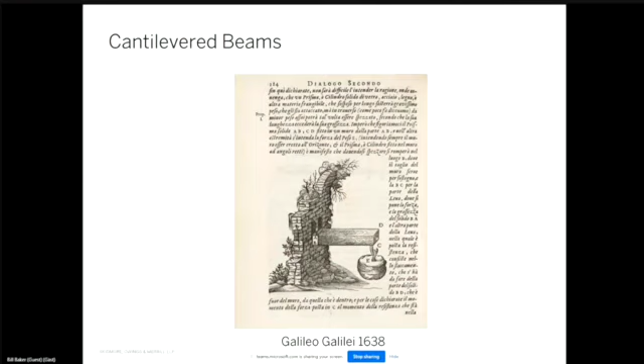The study of cantilever structures goes way back, to Galileo, perhaps the first modern structural theorist, who in his dialogues of 1638 speculated about the engineering mechanics of a cantilever. I can't say he got it completely right, but he got the conversation started.

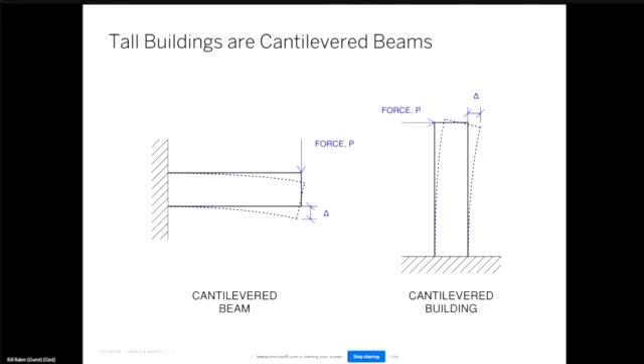While he was dealing with the cantilever coming out of a wall, a tall building is merely a cantilever out of the ground. In many ways it's a conceptually simple problem, because the load only has one load path, which is downward. Through understanding it as a beam, one can come up with very clear ideas.

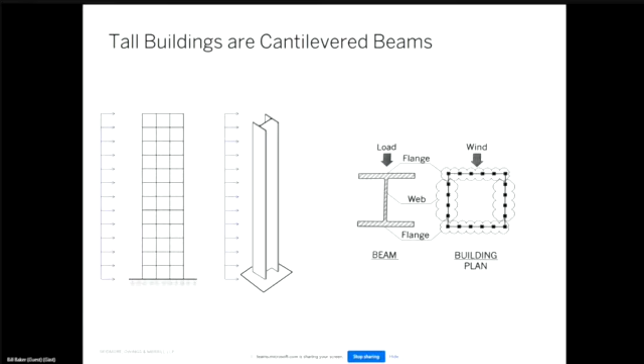So when we think about a tall building as a cantilever, as a beam, we think of the analogy where some parts of the building resist the shear loads and other parts resist the overturning moment — much like an I-beam, where the web resists the shear and the flanges resist the moment.

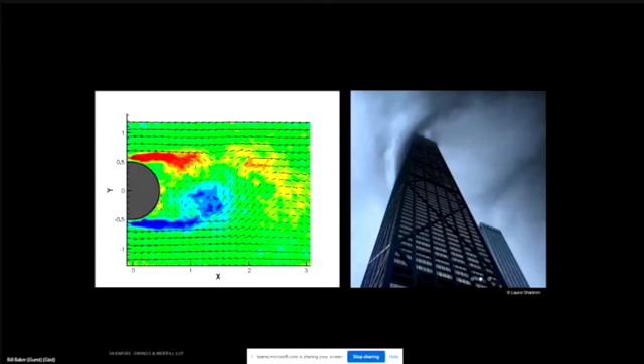When the wind goes past a building or any blunt object — a mountain, a lamppost, or a building — it generally goes first to one side and then the other. Every time that happens, it causes a pressure differential across the building, pulling it side to side, much like a child on a swing.

A child can go very high if they kick their feet at the natural harmonics of the swing, and buildings are harmonic devices also. So it's quite common for the wind to cause vortex shedding at the natural harmonics of the building, and because of that we do a lot of work in the wind tunnel.

We actually have our own in-house wind tunnel here in Chicago that we use for conceptual design and early studies on the design of tall buildings.

Now that we've talked about the main concept and the issue of wind as the dominant concern in a tall building, let's talk about some key structural components. Like many structures, we need strength, we need stiffness, and we need the proper systems.

Concrete does a pretty good job on all three of these — the strength and the stiffness, which I'll talk about, and the way you arrange this into proper systems.

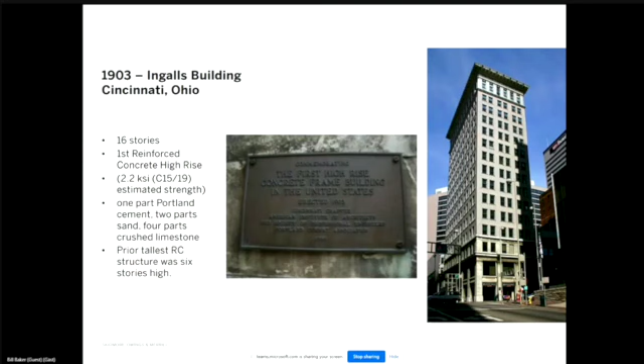Over time, in the more modern era, the post-World War II era, a lot of progress was made. Concrete strengths were up to, in the 1950s, the C40 range — cylinder strength of C40, C50.

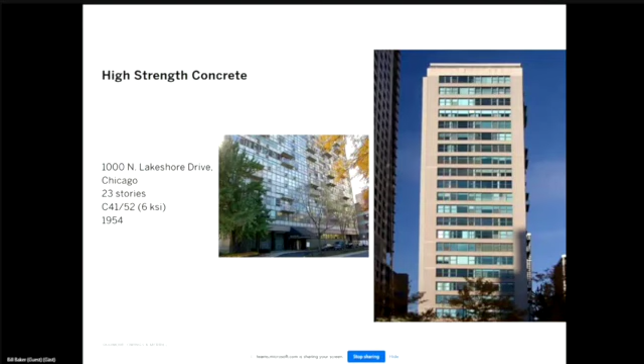A decade further, we're into strengths as high as approaching C50, C60. As time goes on, into the 1970s, we're getting some pretty good high strength concretes, approaching C80.

In the 80s, there were certain cases of extremely high strength concrete, such as this project in Seattle, which had strengths of C130. The strength was actually almost a byproduct.

The goal was to achieve very high stiffness and modulus of elasticity, and I believe on this project the team used granite aggregates. We are often as much concerned with focusing on the modulus of elasticity as we are on the strength in high strength concrete.

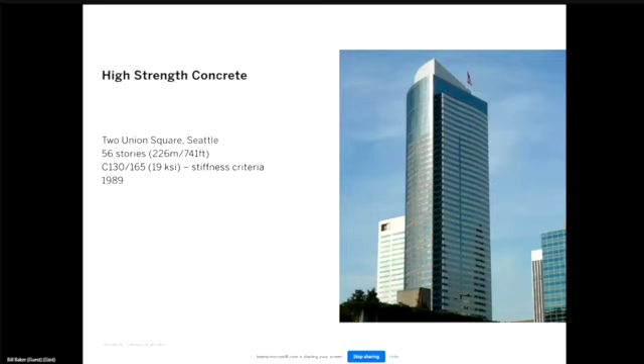I'd have to say today a typical high rise in Chicago would be in the range of a little bit less than this, maybe more like a C80, C90, C100, but a bit more. There are occasions where we go much higher.

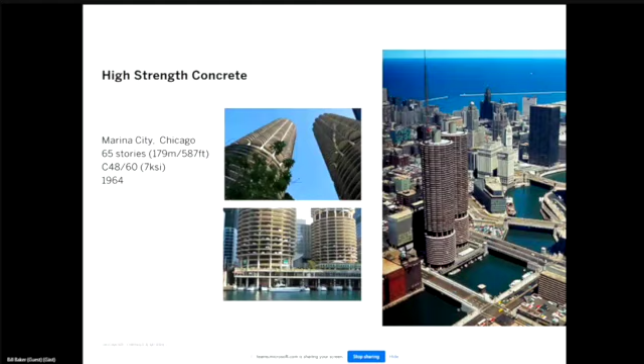Now let's speak to systems. A major breakthrough happened in the 1960s with the research of Dr. Fazlur Khan, Myron Goldsmith and others, and the development of the tubular system. Here is the world's first concrete tubular system, built in the mid 1960s, where conceptually it was thought of in 3 dimensions: the building is considered to be a tube, punctuated with windows, but it still acts very much like a single structural tube, like a giant beam coming out of the ground.

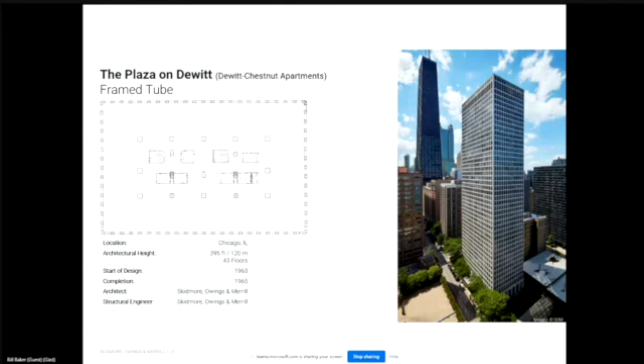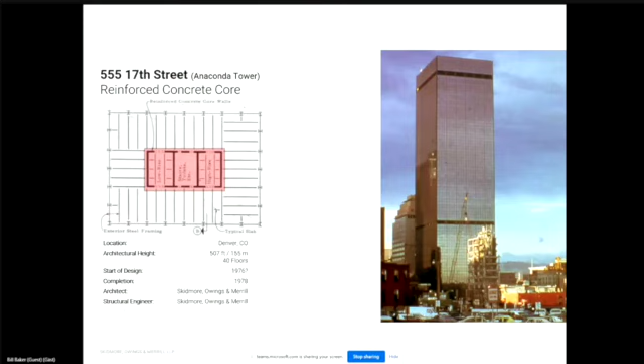Other ideas were developed where perhaps you have a perimeter tube and then use the elevator core system as a place to have additional stiffness. We do a lot of construction where it's mixed construction. That's probably the most common today, but in office buildings it's common to have a mixture of concrete doing most of the lateral work and steel in the floor framing. But in residential, it's virtually all concrete.

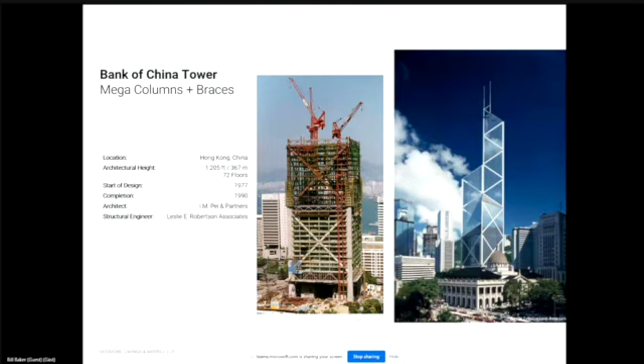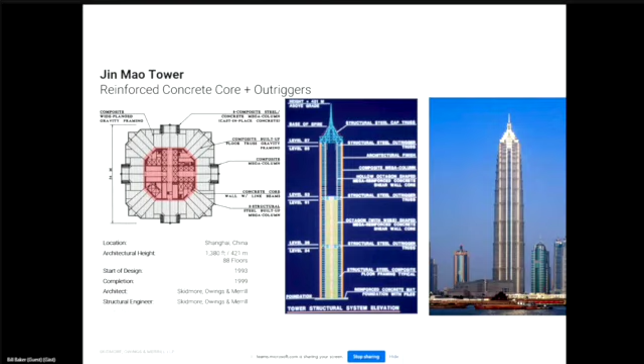There are different ways of mixing concrete and steel together in various towers over the ages, such as the Bank of China, or the Jin Mao Tower in China, which was the first super tall building in China, where the lateral system was principally concrete, even though the floor framing was steel.

So that brings us to the 21st century. Let me speak a little bit about the Burj Khalifa. It's actually interesting: the bigger the problem, the taller the building, the more you have to keep the solution simple. You have to have something that's very, very efficient.

In the process of the design, we started with a building that was about 518 meters tall, which would have made it the world's tallest building by about 10 meters. Soon we realized we could go much higher. It grew temporarily during the design phase to about 728 meters. While still under construction, we looked to see how much higher we could go, and eventually we got the height of the building up to 828 meters. The height changed during the design process by 300 meters.

So going from our initial scheme to our final scheme, the change in height is approximately equal to the Shard in London or the Eiffel Tower. That's how much taller it got from the initial scheme to the final scheme. I'll talk a bit about the initial scheme, which didn't work very well. I'll talk about that in a minute.

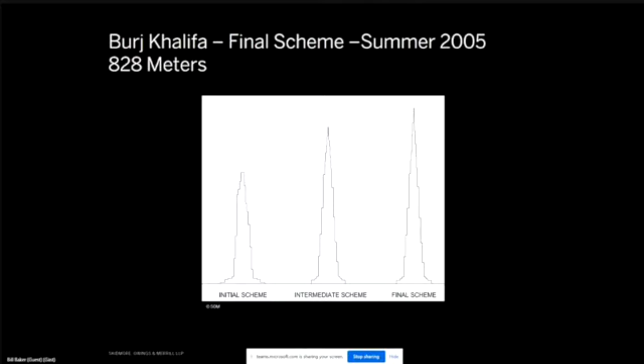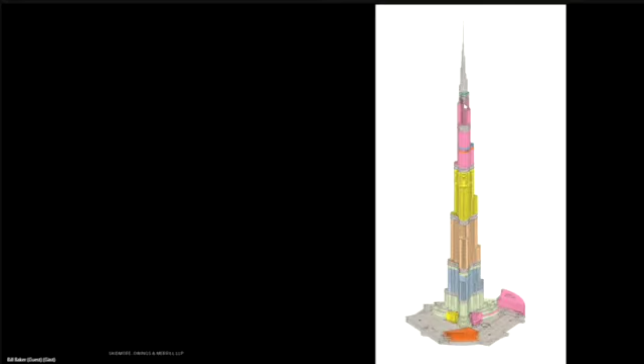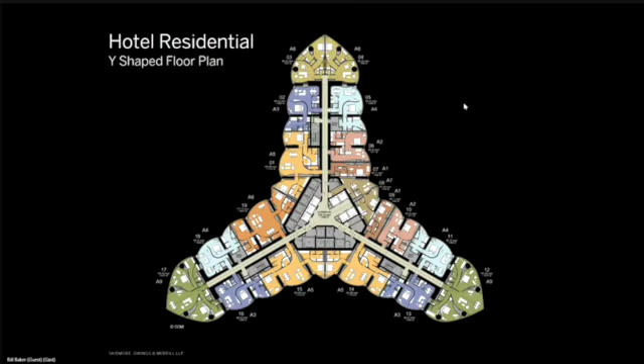As you could tell from the rendering, the floor plans, since the building is primarily residential, it has this Y-shaped plan, which helps give privacy but also gives the building a very wide footprint, which is integral with the structural system. So the architecture and the structure were developed simultaneously. One did not go before the other, but they were developed at the same time.

Now, when you do something that is this tall, you've got to think about issues of scale. This is a very important thing that will allow us to realize this project. So once again, let's go back to Galileo, who studied issues of scale.

If you have a bone that fractures by bending stress, and all the stress in the bone is from the weight of the bone, and you make it three times as long, it has to be nine times as wide if it's a cylinder. If you go through the math, actually Galileo got this one right. So as you go up in scale, you cannot just make some things bigger. Sometimes you have to create something new.

This is something that was also discussed by D'Arcy Thompson in his very famous book on growth and form, an excellent book written approximately 100 years ago. So as one would expect, the bone structures of a small mammal and a large mammal are quite a bit different.

And the same thing applies to tall buildings. You just cannot scale up certain buildings. If you took the Sears Tower, or if you took me, Bill Baker, and made me twice as tall, I'd be twice as wide, twice as thick, and I would weigh eight times as much. It just doesn't work. If you took the Sears Tower and made it twice as tall, you'd have to make it twice as wide and twice as deep, and it would just be too big. You'd be too far from the window. You'd have too much floor area.

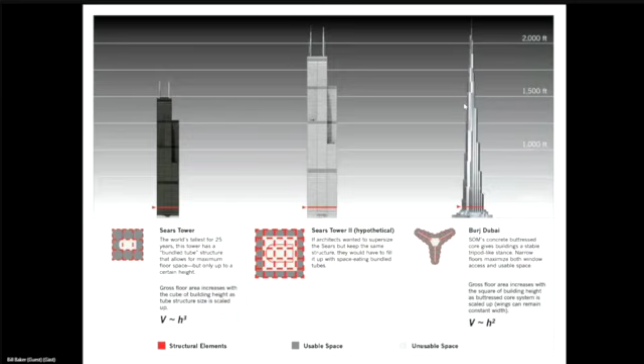So on the Burj Khalifa, we came up with a system which allowed us to scale only by the square. If I make it twice as tall, I'd have twice as many levels, and I'd have to make the wings a bit longer, but I don't need to make them any wider. And that was a very critical piece of why we were able to successfully come up with this building.

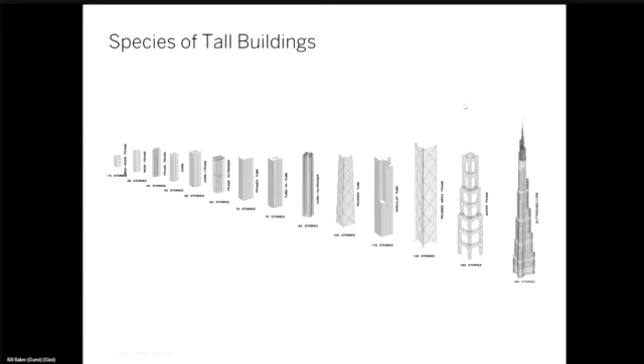And so here's a chart of different building systems. I actually call them different species. If we think about going to a natural science museum, we see the different species of animals. These are different species of structural systems that are appropriate at different scales.

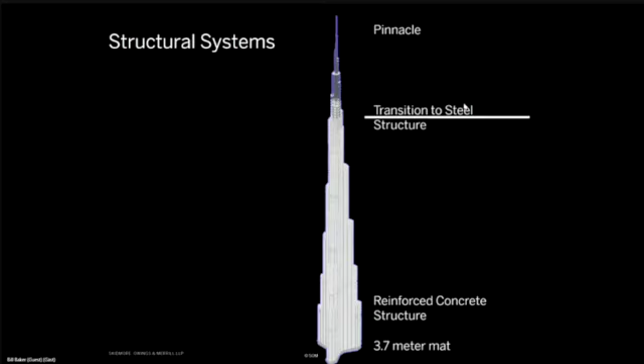Let me talk to you a little bit about the building. As you know, it's primarily reinforced concrete. At the very top is a steel pinnacle.

We wanted to use very conventional systems. I remember one time I gave a lecture, and someone in the audience was a little bit critical about why didn't I do some more unusual structural subcomponents. My answer was I wanted the building to actually get built. Because if you come up with systems that contractors have never seen before and ask them to make the world's tallest building, you're probably not going to be very successful.

So what we wanted to do is have structural systems which were very familiar to many contractors, and then put them together in perhaps a little bit of a unique way that they could then use. And we actually had seven companies with real credible bids for the project.

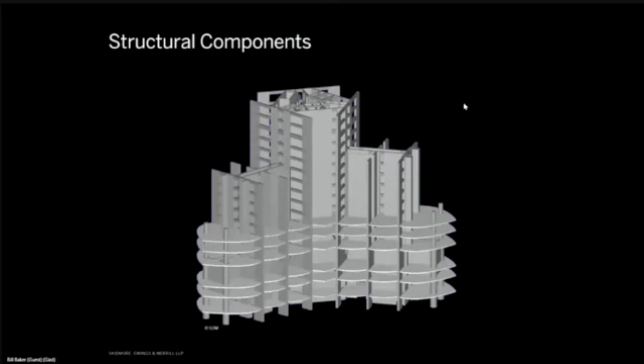In the process, what we were building is a system which we called a buttressed core. We find it's very useful to describe your ideas. At the beginning of a design process, it's good to let things be very free and open. But at some point, when you think you're getting very close to the idea, try to describe it in words. And if it takes a lot of words, maybe you're not there yet.

But if you can describe it in concise words, such as in this case the buttressed core, or the John Hancock Center, a braced tube, or the Sears Tower, a bundled tube, it helps you understand what is important. It helps because these tall buildings are all about resolution of conflicts. So the question is, who gets the right of way? And certainly in a super tall building, the important parts of the structure should get the right of way. Once you have that clear concept, you can explain it to the rest of your team and to the other disciplines.

You can explain it to the contractor and the owner, and it helps resolve conflicts.

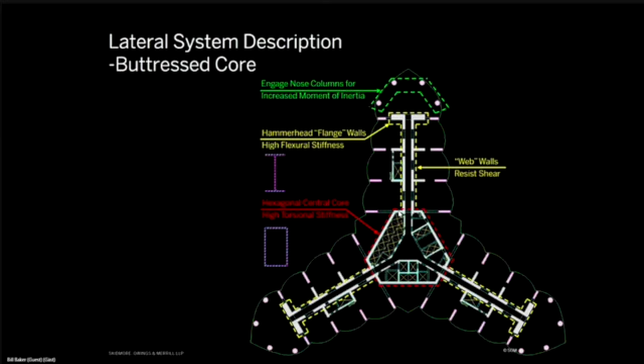One can imagine there's a vortex. The wind is going against the building, forming a vortex which pushes on two of the wings. The third wing acts like a buttress to resist it. In the very center is a hexagonal concrete core that goes around the principal elevators and stairs, and that acts like an axle, because the last thing you want is for a tall building to twist in the wind—that's very disruptive. So we had this concrete core, which was very good for the twist but too slender to go to great height, so we buttressed it with the three wings of the tower.

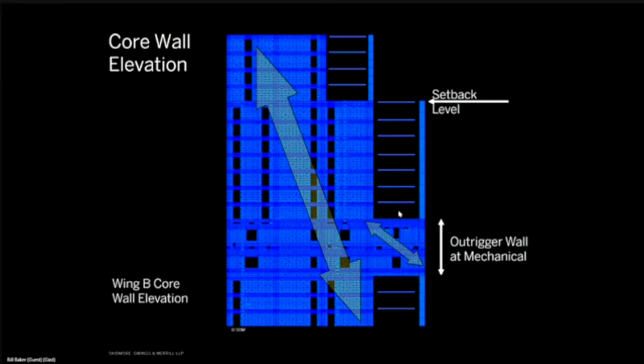Now, one of the most important things in a tall building, especially a concrete building, is managing gravity. The weight of the building is very useful. Gravity is very reliable—you don't have to worry about it not being properly inspected, it'll be there. So what we try to do is push the wind forces, or the gravity forces, outward to make it stable.

By managing gravity, and controlling the wind, we were able to reduce the forces so that there's no tension at the base, even in a storm that happens once every 1,700 years. So with a 1,700-year return period windstorm, you still do not have any tension at the base of the Burj Khalifa.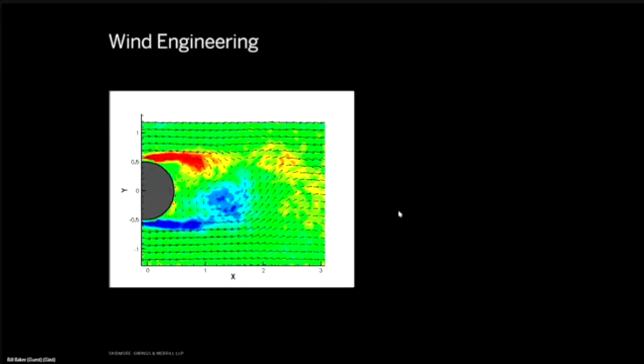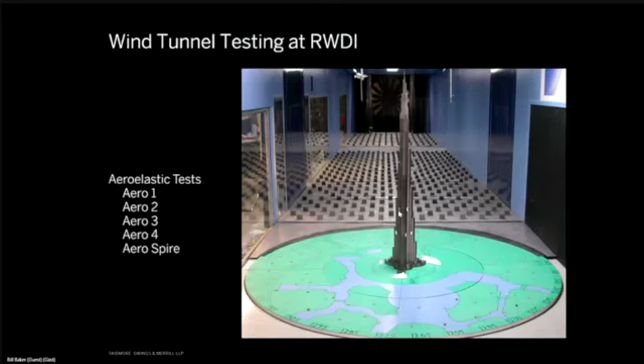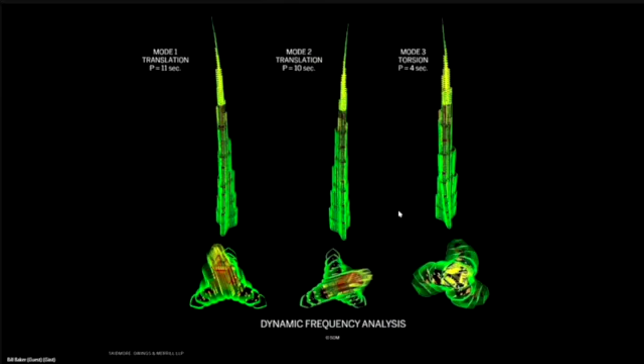As I said earlier, wind is hugely important in tall buildings. So we did a whole series of wind tunnel testing to figure out the forces on the building. Then we essentially tuned the building like a musical instrument to get certain mode shapes, generalized mass, periods, and certain behavior, and then we shaped the building.

Remember the analogy of the child with two feet kicking in unison, going very high. We figured out the building had three benign directions, where the wind blew into one of the legs—it was like a cutwater, very benign. But when the wind blew between two of the wings, it was not benign at all; it had big forces.

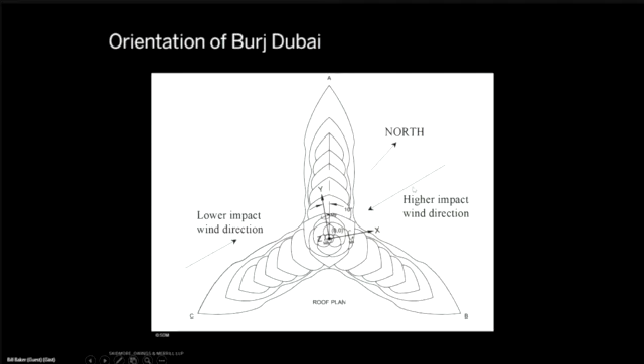So the engineers and architects, working very closely together, looked at ways to reshape the building multiple times as it goes up. The analogy to the child on the swing: rather than having two feet kicking in unison, you essentially have

27 feet. Because the vortex shedding comes off at different rates for every cross section, instead of these 27 feet kicking in unison, they're all kicking at a slightly different rate, so the swing goes nowhere, and the dynamic forces are quite modest.

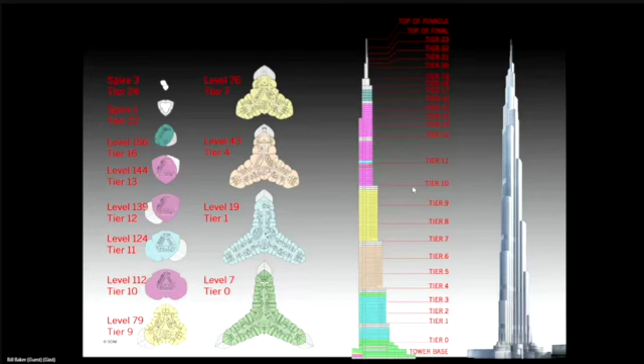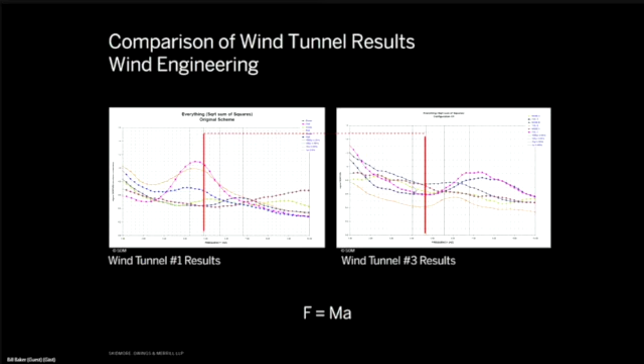After just three shapings—hopefully you can see this chart with a red line—we were able to reduce the wind forces quite a bit after just a few shapings of the building. The red line represents a 100-year storm, which we looked at. In the process, we were able to make the tower much taller than where we started.

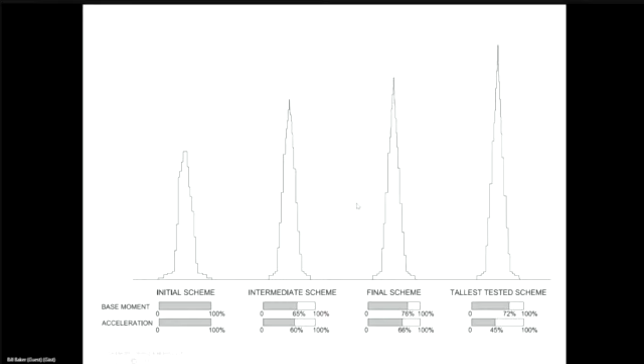Now, it turns out the first shape we had did not work very well—we had very large moments and accelerations. So we went back into the wind tunnel and reshaped the building a lot, and in the process the forces went way down and the motions went way down. In fact, if the first shape hadn't behaved so badly, we probably would have just stopped there. But because it behaved badly, we had to do a lot of important studies and reshaping, and because of that, we were able to go much taller than we ever thought we could.

The construction is concrete, of course, and this stuff is like magic—we should give it a new name. Look at the properties of this material.

This is not the stuff that's in the sidewalks, and we were not overly ambitious in the strength. It was a C80, so a cube strength of C80, a 64 cylinder design strength. That was kind of what you could get in Dubai at the time, though you can now get better stuff. But what was delivered to the site was 100, or 80, 100 cylinder, 100 cube strength. Very high modulus elasticity, very, very amazing material.

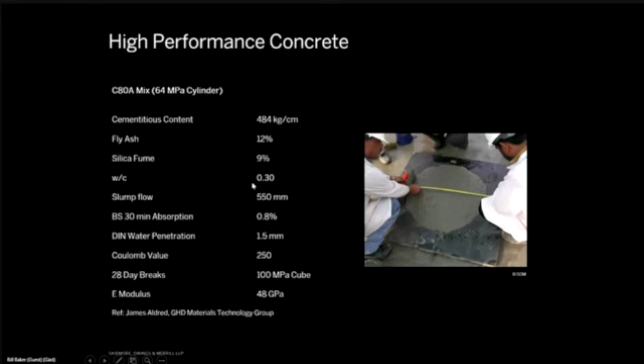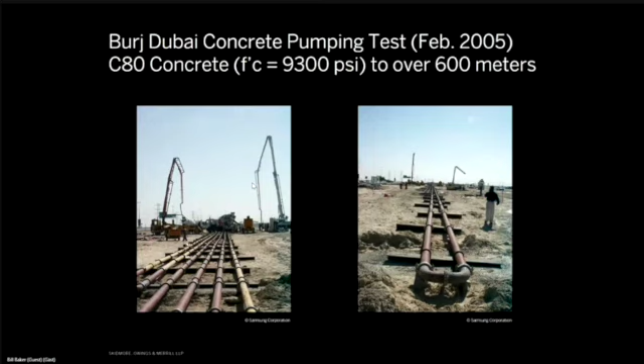The contractor figured out how they could pump the concrete 600 meters in the air, and they tested this by running pipes back and forth across the desert floor until they got the pressure loss that you would expect to see from going vertically that high. So I'll take you through the construction sequence. It went pretty fast.

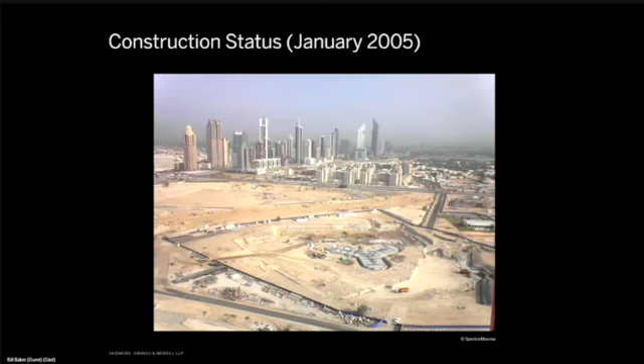The superstructure foundations were finished in late 2004. The project sat there for a while, with some contractual negotiation going on. But then in April 2005 the construction went, and the building topped out in 2009 and was opened in 2010. So the construction time was fairly reasonable.

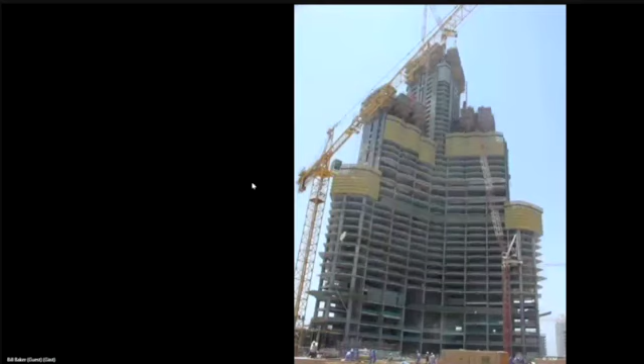As you can see, as it went up and up, the cladding contractor went bankrupt on us, so it took a while to get another contractor on board. So you saw the bare structure for quite a while.

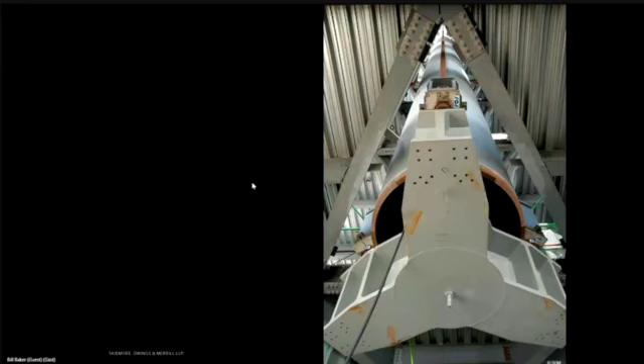At the very top, we couldn't build the spire from outside the building because we couldn't get cranes up that high. So we built it inside the building, and then we jacked it into position using Freyssinet jacks. The building got up. The spire is up there.

We actually did some very sophisticated wind engineering on the spire at the very top. Because the spire is so high, it tends to be the lightning rod for the city of Dubai. I've been there at times when there's been weather coming through, and the top of the tower probably gets struck by lightning maybe every 5 minutes, because the building is grounded and the skin acts like a Faraday cage. There is no damage to the building.

After the building was completed and it was all washed, it was amazingly beautiful to see.

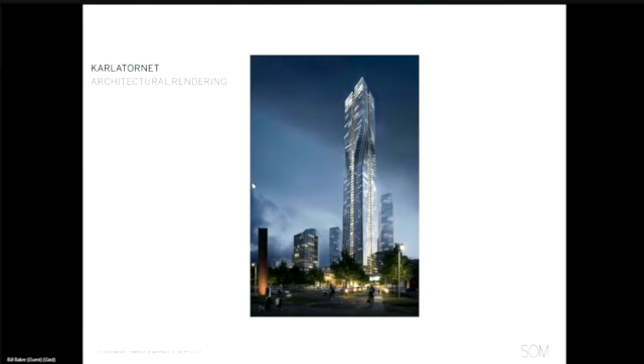So let's bring us to where we are today in the world, and we're very fortunate to be working in Sweden on what we call the Karla Tower, the Karlatornet, in Gothenburg. It's a very, very sophisticated design using C70 cylinder strength concrete. It's a core and outrigger system, which is a very good system for a tall residential building.

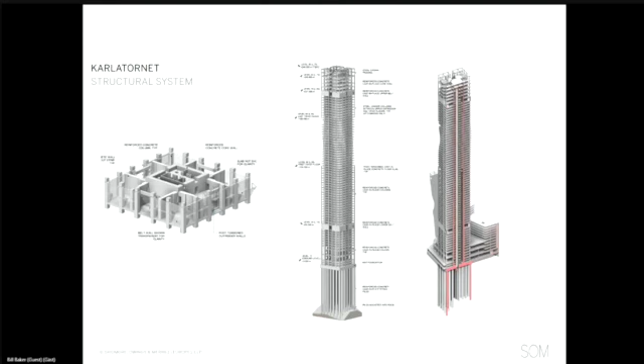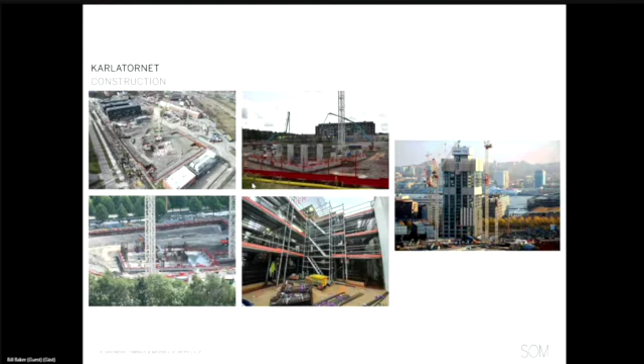The foundations are quite an effort in themselves, because the soils near the surface are not so good for bearing, but there's some good rock down deep which we have to get to. Here are some construction photographs of this very, very nice building in Gothenburg.

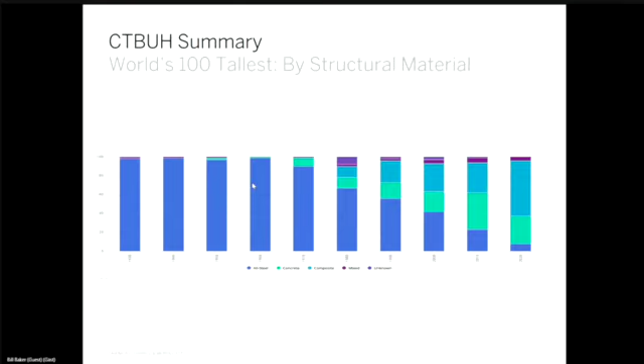It used to be, you would say, if you were trying to do a tall building, it's structural steel. Now that is not true. If you look at the 100 tallest buildings by structural material, they are mostly either concrete or composite, a mixture of steel and concrete. Very few all-steel buildings. Usually the concrete is very dominant in the lateral system because of its strength and stiffness.